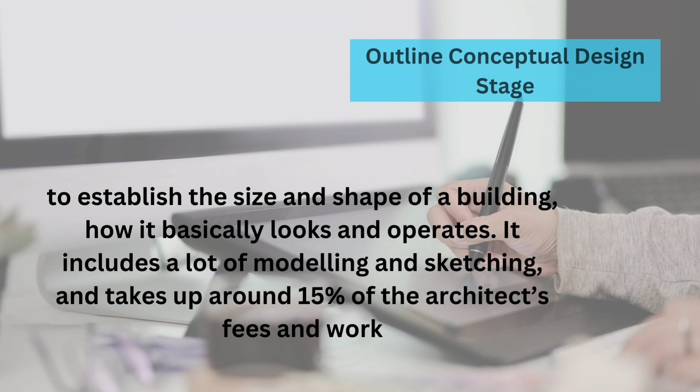Preliminary design is the stage in which general project location and design concepts are determined. Preliminary design can include a wide range of preliminary engineering and other activities and analyses, including but not limited to environmental assessments, topographic surveys, metes and bounds surveys, geotechnical investigations, hydrologic analysis, and so on.

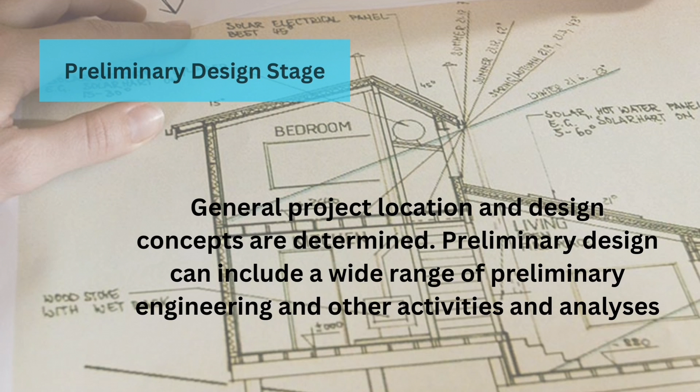After this stage comes the design development phase, during which the client and architect select materials such as interior finishes, and products such as fixtures, doors, windows, and appliances. The sketches will be revised, and there will be more details and specifications.

Completion of working drawing: a drawing or blueprint based on explanations. It is also completed with a thorough plan and views that will help ensure the product construction or replication without any additional information.

Construction supervision: 7 activities.

Preliminaries: the section in the bills of quantities which groups together items which are necessary for the contractor to complete the works, but will not actually become part of the works, such as scaffolding, plant, water, the cost of power to the site and other site overheads. The preliminaries section also often summarizes the contractual terms and services to be provided by the contractor.

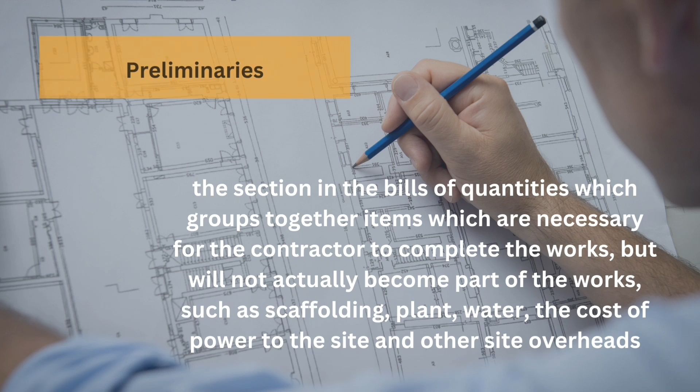Demolition: in the construction sector this means the bringing down of buildings and other structures that are load-bearing or otherwise related to the physical integrity of the structure.

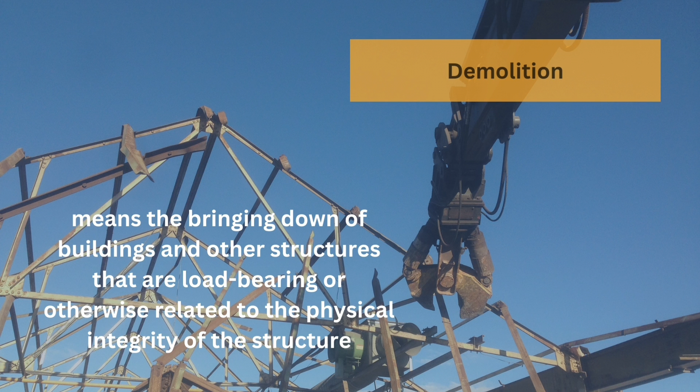Excavation and foundation: the equipment-heavy task of removing the earth from the allotted area in order to make room for the foundation. Depending on the depth and hardness of the soil, the trench may need to be reinforced as earth is removed.

Concrete and brickworks, also called masonry construction. Masonry consists of building structures from single units that are laid and bound together with mortar. Brick, stone, and concrete blocks are the most common materials used in masonry construction.

External works describe primarily the areas immediately surrounding the building, and provisions include minor roads in a housing estate, paved areas, boundary walls, railings, fencings and turfed areas.

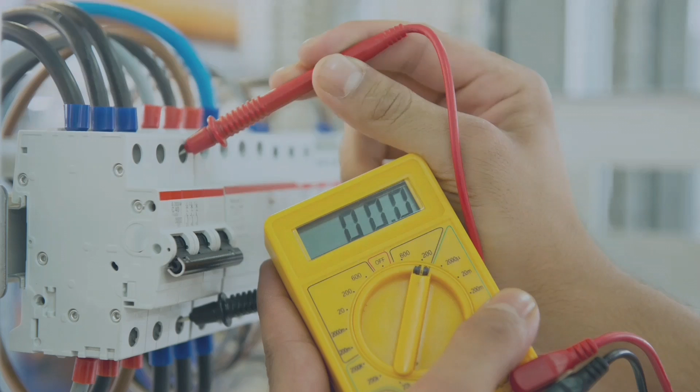M&E works: mechanical and electrical, M&E, refers to the mechanical and electrical systems installed and operated by a facility management company in facilities management. Building services are the systems that are built in buildings to make them comfortable, operational, efficient and safe, such as lighting, drainage and water supply. Mechanical and electrical engineering, however, can be a broader sector than this, covering fields beyond construction and design, such as large-scale power generation and transmission, transportation systems, heating and ventilation, industrial installations and so on.

Finishes: building finishes comprise plastering, pointing, painting, varnishing, white/color washing or distempering. These finishes are performed to satisfy certain functions. They primarily form a protective coating to the exposed surface, which implies that the finishes preserve and protect the materials and thereby increase the lifespan of the materials. These finishes also add to the aesthetic view of the building and form a sort of decorative item.

Construction activities: any and all activity incidental to the erection, demolition, assembling, altering, installing or equipping of buildings, structures, roads, or appurtenances thereto, including land clearing, grading, excavating and filling.

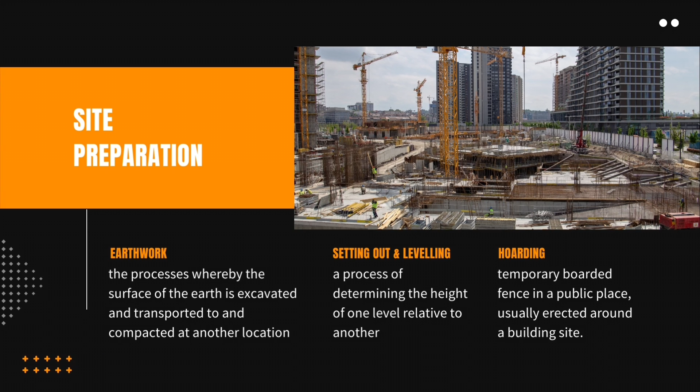Fourth, hoarding. A hoarding is defined as a temporary boarded fence in a public place, usually erected around a building site. These are used to protect the public from site works whilst also being used to display advertisements.

Fifth, dewatering system: a term to describe the removal of groundwater or surface water from, for example, a construction site. In construction, water is pumped from wells or sumps to temporarily lower the groundwater levels, to allow excavation in dry and stable conditions below natural groundwater level.

Sixth, temporary building: a building or any part thereof that will be used for a period of time not exceeding 1 year from the date of placement of such a building, but does not include a mobile home intended for single-family residential occupancy. Temporary structures are used to facilitate the construction of buildings, bridges, tunnels, and other above and below ground facilities by providing access, support, and protection for the facility under construction, as well as assuring the safety of workers and the public.

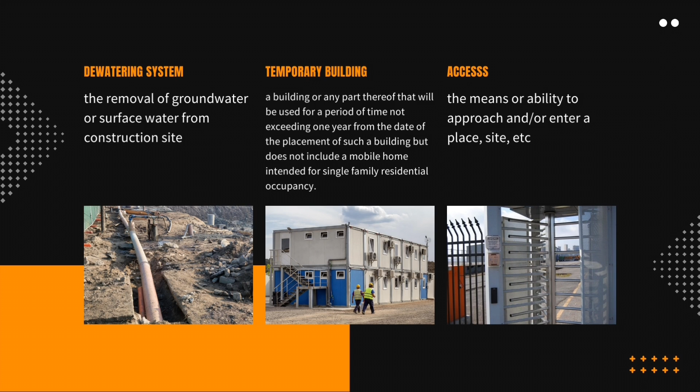7th, access: the means or ability to approach and/or enter a place, site, etc. Without proper access control, workers risk unintentionally entering an area that poses any number of health threats - chemical exposure, hearing damage, head injuries, or worse can occur when a worker enters an area without the correct safety equipment. Working in construction doesn't have to be inherently risky.

Now, for the key players involved in construction. The owner: the person or organization that owns a built asset, such as a building, bridge, tunnel, etc., or land. But it may also refer to ownership of the components of a project.

The designer or estimator, that includes architect, civil and structural engineer, mechanical and electrical engineers, and quantity surveyor. These are people or individuals whose business involves preparing or modifying designs for construction projects, or arranging for or instructing others to do this. Designs include drawings, design details, specifications, bills of quantity, and design calculations.

The constructor: someone who undertakes a construction project for an owner, like a general contractor, and may also include an owner who undertakes the entire or partial project by himself. Plain and simple, constructors have the overall responsibility of a project in making sure everyone follows the mandatory regulations.

In the execution of this function, the organization's mission, objectives, goals, and strategies are determined. In construction control, construction is monitored by the project manager. We compare the construction as planned versus actual progress based on work programs, and other controls such as IT, cash flow, and inspection.

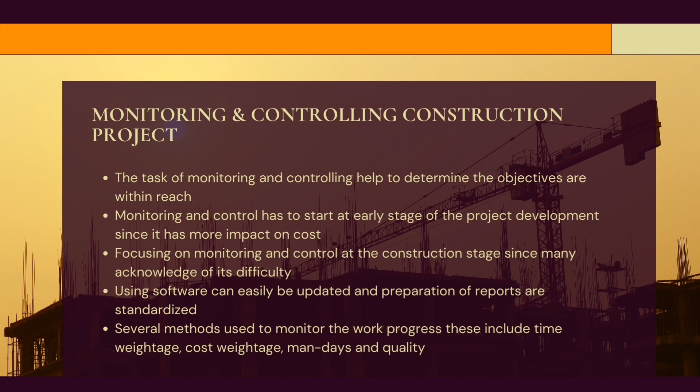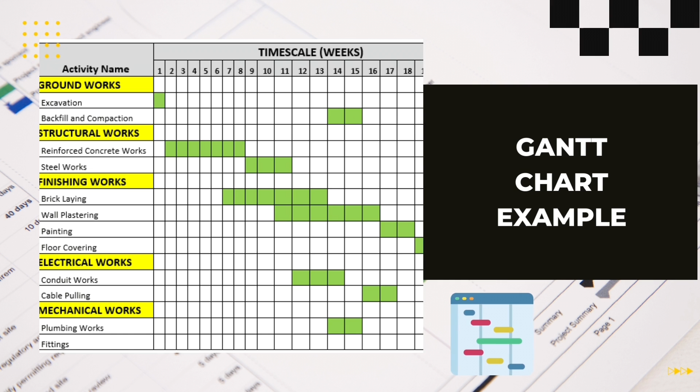Here is an example of a Gantt chart that illustrates a project schedule and shows the dependency relationships between activities and current schedule status. Essentially, a Gantt chart gives you a visual overview of all tasks against the construction timeline. Gantt charts display important information like who is assigned to which tasks, the estimated duration of tasks, and any overlapping activities within a project plan. Gantt charts can help streamline your projects and make for ideal solutions when it comes to planning, avoiding delays, monitoring tasks, and completing projects by their finish date.

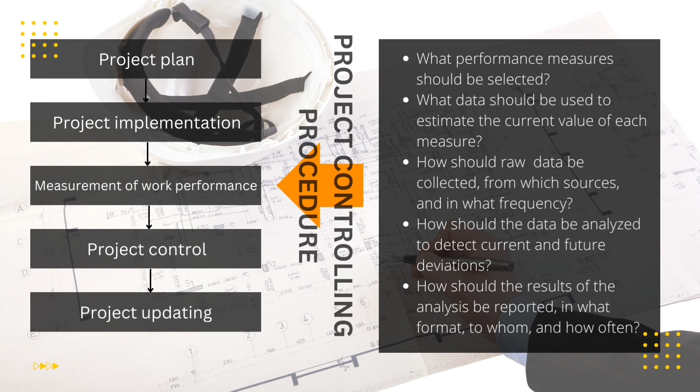This is a procedure for project controlling. Implementation of project controlling. There are 5 elements of project controlling: forecasting, budget, action plan, milestone, and tools.

What is a successful construction? A project that meets the given standards, is finished in time, and within the budget.

Number 1: create a flow of communication. Number 2: make a habit of continuous planning. Number 3: observe and ask questions. Number 4: budget project with a work execution platform. Number 5: embrace an automated reporting system. Thank you.